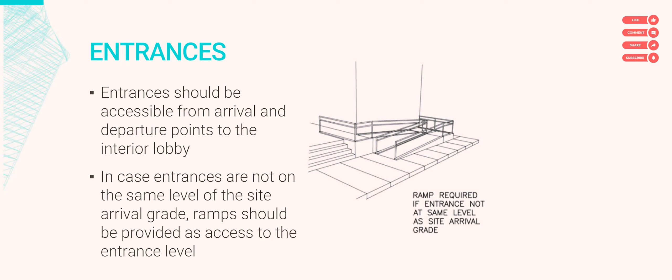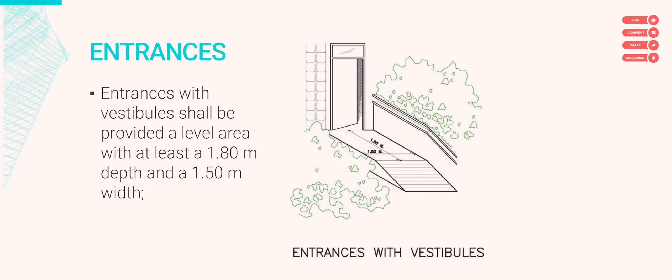Any change in level requires a ramp except when served by an elevator or any other mechanical device. Ito yung sinasabi ko, ramp yung pinaka-obvious na device, but there are times na hindi kasya yung ramp in a certain corner of the building. Kung hindi ka pwedeng mag-ramp, then find a different way. Dapat makahanap ka ng mechanical device that will do the same thing. The problem usually is you need to get from a lower elevation to a higher elevation or vice versa. Kung pwedeng ramp, ramp. Kung hindi kasya, usually a mechanical way of accessibility, so wheelchair lifts, elevators, etc.

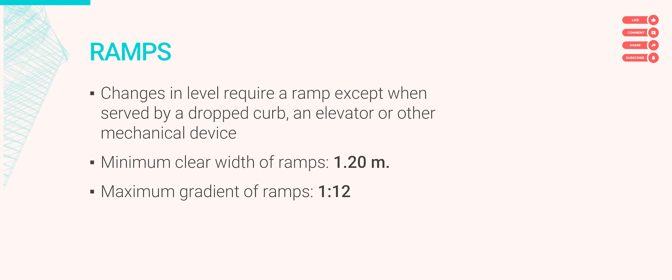For ramps, the minimum clear width is 1.2 meters and the maximum slope is 1:12. For those who have trouble understanding, ano ba yung 1:12, 1:20, 1:100? Pag sinabing 1:12, 1 unit vertical and 12 units horizontal. Pag sinabing 1:20, 1 and then 20, so it's going to be flatter. 1:20 is flatter than 1:12. Ito yung requirements for ramps illustrated: minimum width 1.2, maximum slope 1:12.

Other requirements: maximum ramp length 6 meters if the gradient is 1:12. If it needs to be longer than 6 meters, there have to be 1.5 meter deep landings before the next run of the ramp. Please also take note na yung 6 meter maximum length is measured horizontally, along the ground surface, not along the sloping surface of the ramp. That's very important.

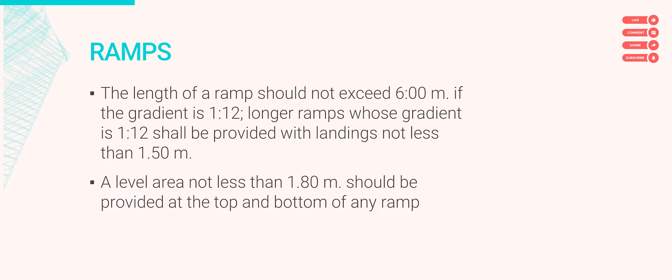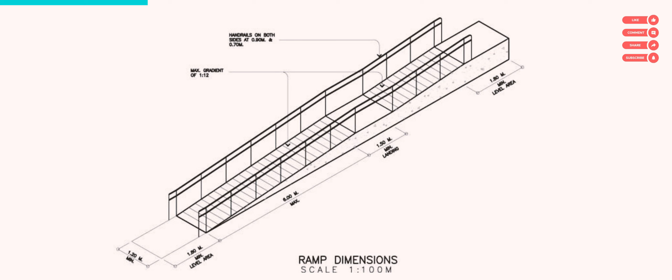There has to be a level area at least 1.8 meters deep at the top and at the bottom of any ramp. This is the bottom and this is the top. Meron tayong clear space measuring 1.8 meters deep, deeper than the landing, which is 1.5 lang. The others you're already familiar with: yung handrail, dalawa, isang 900, isang 700.

Other requirements for ramps, bukod sa handrail na 0.7 and 0.9: there have to be curbs on both sides with a minimum height of 0.10 meters or 100 millimeters. Both sides, meron kang low wall or zocalo about 4 inches tall, 100 millimeters, both sides of the ramp. That's required. Okay, next.

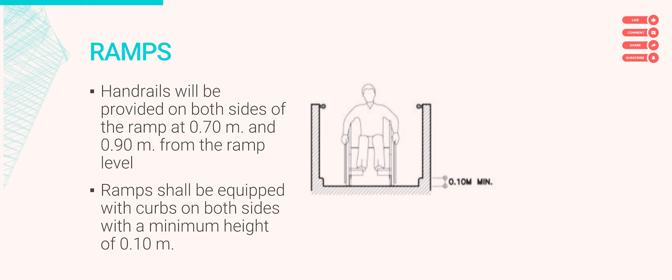Any ramp with a rise greater than 0.2 meters leading towards a vehicular area should have a railing across the full width of the lower end, not less than 1.8 meters from the foot of the ramp. So what's this about? This is about yung mga ganito, yung mga ramp na nakatutok siya sa kalsada. First of all, try to avoid doing this. Now, if you can avoid it, please avoid it. Kasi it could lead to nasty accidents for obvious reasons.

Nakatutok yung ramp sa kalsada. Try not to do that. But if it cannot be avoided, then you must look at this requirement because it might apply to your ramp. So first of all, this requirement applies to ramps na nakatutok sa kalsada, at least 0.2 meters tall. For ramps like that, dapat daw lagyan ng railing 1.8 meters away from the lower end of the ramp, from the foot of the ramp.

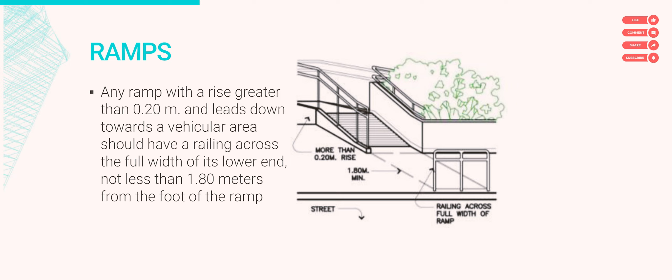You have this railing, standard railing siya, 900, 700, as wide as the ramp. Okay, ang purpose nito is yun nga, parang pang-catch siya in case merong ma-aksidente, like, pagka, I don't know, maybe you lose control of the wheelchair, we don't want you to fall down dun sa driveway, baka masagasaan ka. This railing is supposed to parang catch that, to prevent that from happening.

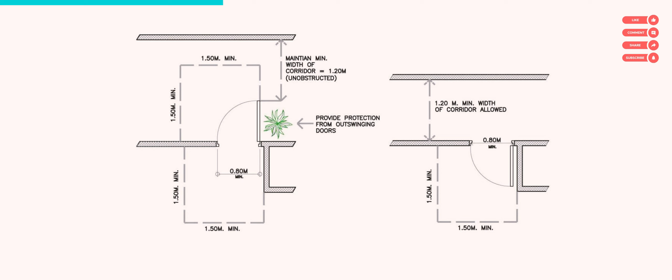Okay, now doors, minimum lapad lang yung binigay sa BP 344, minimum clear width is 800 millimeters. Okay, another requirement for doors is this. Dapat daw, well, first, if the door swings out into a hallway, then there have to be clear spaces 1.5 by 1.5 on both sides of the door. So again, 1.5 by 1.5 yung clear space, both sides of the door, if the door swings out into the hallway. Pero if the door doesn't really swing out, it swings in, then the 1.5 by 1.5 space is only required on the side of the room, not on the hallway. Yung sa hallway, kung ano lang yung required for hallways, which is 1.2, yun lang yung dapat i-provide.

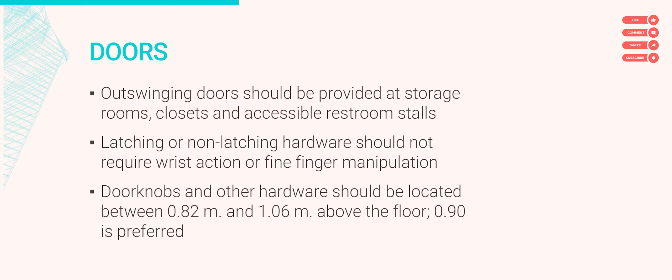Next, doors should swing out for storage rooms, closets, and PWD toilets. Dapat swing out. The hardware that you use for these doors should be easy to operate, not requiring complicated finger actions. Okay? And yung hardware should be mounted at the correct height. Ang nakalagay dito, anywhere between 0.82 to 1.06 meters from the floor line is okay, but the preferred height is 0.9 meters. So ito yung hardware. Again, anywhere between 0.82 to 1.06 is acceptable, pero the preferred height is 0.9.

Kung hindi doorknob, kunyari if you're going to use pull handles, try to mount them vertically. Dapat daw vertical mounting for easier operation. And the center line of the vertical handle should be at 1.06 from the floor. Okay, so ito yun. Again, if you're going to have a pull handle, ayaw natin yung horizontally mounted, dapat vertically mounted siya. And the center line of that handle should be at 1.06 meters from the floor.

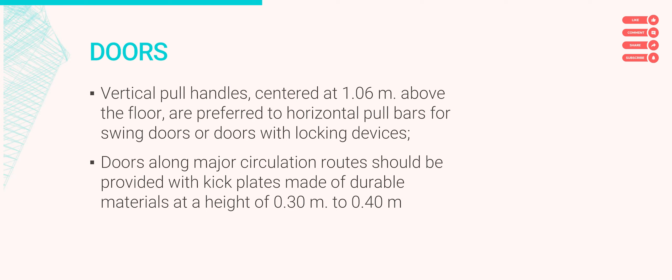If the door is located at a busy location, a major circulation area, then dapat meron siyang kick plate at the bottom made of a durable material, 0.3 to 0.4 meters in height. Kung busy location, busy area, basically kung yung door is going to be used many times in the day, then dapat lagyan siya ng kick plate. Ito yung kick plate natin. Sa baba, 0.3 to 0.4 yung height, made of durable material, like maybe metal.

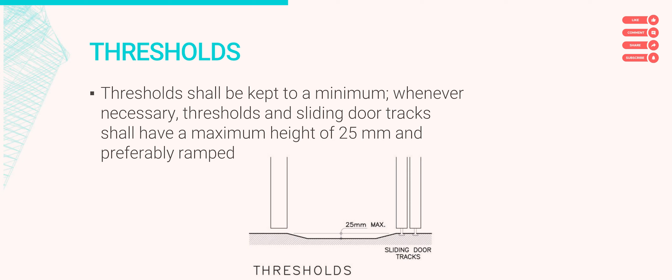Next, thresholds. For those who are unfamiliar, the threshold is parang the part of the floor underneath the door. Why do we need to talk about them? Kasi madalas dito nangyayari yung change in elevation. May step down, may step up dyan sa threshold. So, sabi dito ng BP 344, thresholds if necessary should have a maximum height of 25 millimeters and kung kayang gawing ramped, better. So, maximum height 25 millimeters lang. And kung kayang hindi gawing kwadrado, kung kayang gawing ramped, para mas suwabe yung transition, better.

Next, switches. As in switch ng ilaw. Correct mounting height ng switches, 1.2 to 1.3 meters from the floor and they should be located on the latch side, or the doorknob side. Not too far away from the doorknob side either. 200 millimeters maximum from the doorknob side.

So again, doorknob side dapat yung switch, wag sa hinge side, mas mahirap abutin doon. Ideally, pag bukas mo ng pinto, abot mo agad yung switch. So dapat nasa doorknob side siya. And not too far away either. Dapat maximum 200 millimeters away from the door. Okay? As for the mounting height, 1.2 to 1.3.

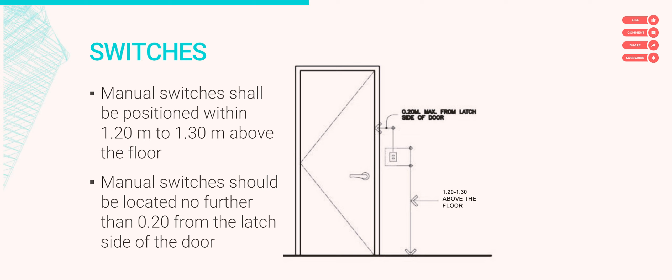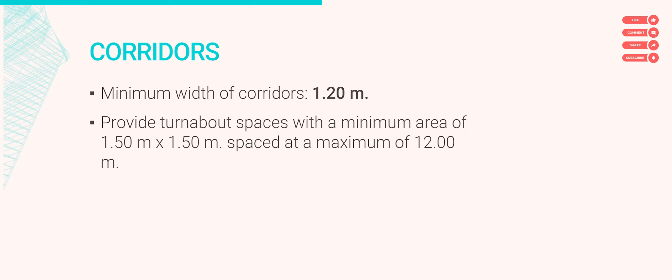Okay, corridors. Corridors in buildings are a lot like walkways sa labas, a lot like sidewalks. Lalakaran siya ng tao. So, a lot of the requirements that applied to sidewalks kanina actually apply to corridors as well. Like, for example, the minimum width is still 1.2. The turning space requirement still applies. Again, 1.5 by 1.5 clear space with a maximum spacing of 12 meters.

Same requirement. The only maybe new requirement for corridors na hindi applicable sa sidewalks before is this, yung turning space at the dead end. So, BP 344 requires na may turning space dapat na i-provide dito sa dead end. Again, the turning space measures 1.5 by 1.5. Kung may dead end ka, lagyan mo siya ng turning space. Kung hindi mo kayang ilagay dyan exactly, pwede mo siyang ilayo ng bahagya basta not farther than 3.5 meters away from the dead end.

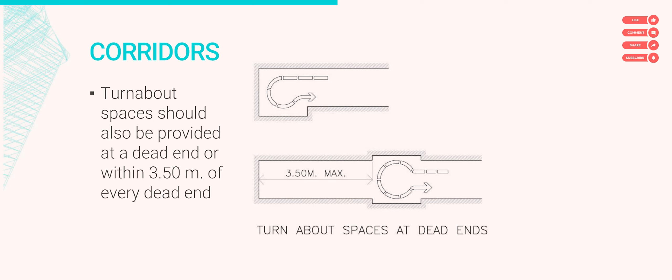Alright, let's talk about toilets. For PWDs, the toilet stall must measure 1.7 by 1.8, so 1.7 wide by 1.8 deep. As for how many PWD toilet stalls must be provided, you have to count kung ilang water closets yung meron for that floor. Okay, for every floor. And also per gender, kasi most toilets are gender-based. There's one for males and one for females.

Okay, pero for every 20 or less water closets, dapat at least one of them should be a PWD toilet stall. Again, there should be at least one PWD toilet stall if there are 20 water closets or less. And you increase the minimum to 2, at least two PWD toilet stalls if the water closets are more than 20. Okay, so again, that's what you do.

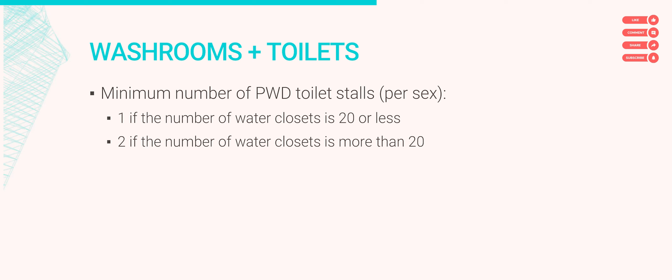So for example, isang toilet lang for males and another lang for females for this floor. All you need to do is look at how many water closets are there in each toilet. Okay, so if both naman have less than 20 water closets, then isang PWD toilet stall lang yung kailangan. Okay, let's go back to that toilet stall drawing. Other requirements for PWD toilets.

The mounting location of the water closet is 0.4 from one edge of the toilet stall. Hindi mo dapat ginigitna yung water closet sa stall. It has to be on one side only, 400 from the center line to the wall. Ang purpose is we're trying to free up this space for the wheelchair. Other requirements, yung grab bar, meron kang 900 by 900 na grab bar at the corner where you mount your toilet or your water closet. The door is 900 millimeters clear.

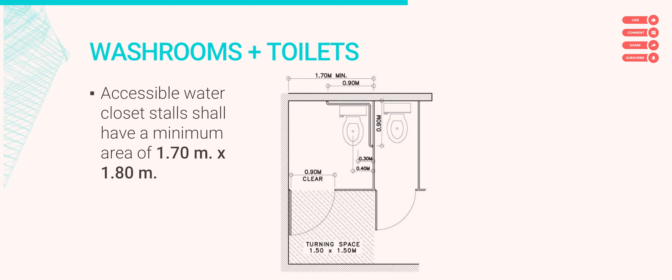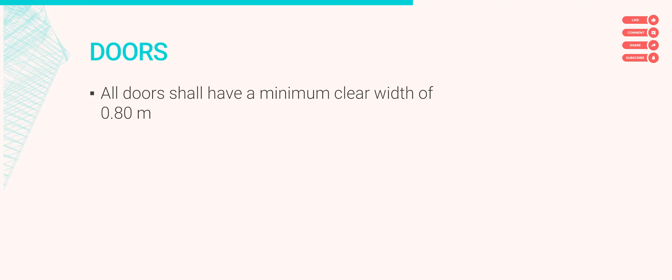Well, actually, this is wrong. I'm sorry. I don't know where I got this drawing. Pero standard door lang tayo, so 800 lang yung requirement ng BP 344. Pero it has to swing out. That's correct. We said that about toilet stalls. And another new requirement is turning space should be provided outside the PWD toilet stall, measuring 1.5 by 1.5. Okay, let me go back and make sure. Doors, yeah, the minimum clear width for doors is 800. So dapat 800 yung nasa drawing na yun.

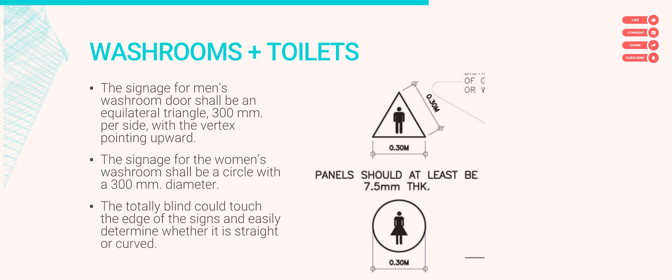Okay, other things, toilet signages. For men's toilets, dapat triangular, pointing upward, equilateral triangle, 300 per side. For women's toilets, bilog yung signage, 300 millimeter diameter. The purpose of this is so that the blind can easily tell kung men's or women's toilet ba yung toilet, because all they need to do is touch the signage. If there's a curved edge, they know right away it's for women. If there's a straight edge or a sharp corner, they know right away it's for men.

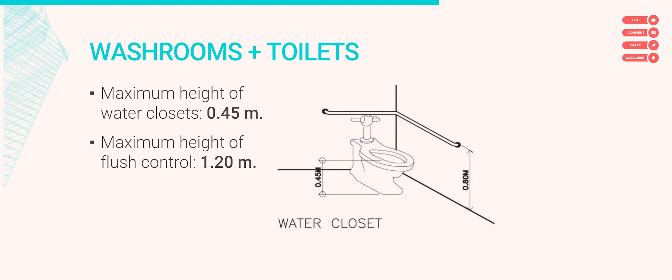Okay, other things, maximum height ng water closet seat is 0.45 meters. Maximum height naman ng flush control is 1.2 meters. Another thing, something that you won't see in the text but is in the official drawings: 0.8 dapat daw yung mounting height ng grab bar.

Okay, for lavatories, the lavabo maximum height is 800. A lot of students get this wrong, a lot of them for some reason answer 850. But again, it's 800 millimeters from the floor, maximum.

And the space under the lavatory should be a clear space. We call that the knee recess space. Imagine you're in a wheelchair, if you're going to use the lavatory to operate the faucet, you might need to insert your knees under the lavatory a bit to reach the faucet. So that's what this space is for. That's why it should not be obstructed with drawers or cabinet doors. It should be a clear space. The clearances required are 0.6 to 0.7 vertical and 0.5 horizontal, or the minimum depth is 0.5. As for urinals, for them to be considered accessible, it should have an elongated lip.

This is what an elongated lip looks like, and the maximum height of the lip is 0.48. Now, it's not in the text, but it's in some of the official drawings that an accessible urinal should have a grab bar. The grab bar is 600 millimeters tall, mounted 600 millimeters from the floor.

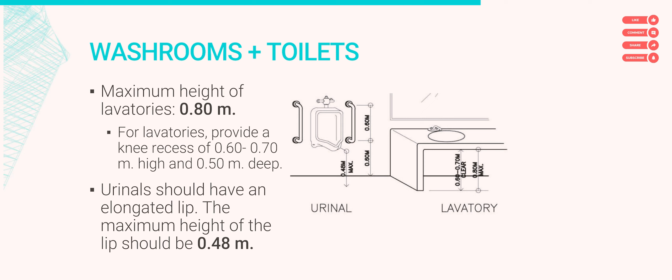Okay, for stairs, the tread should be slip resistant, which is obvious. And for the nosings of the tread, slanted nosings are preferred to projecting nosings or to open stringers. This is what's called a projecting nosing. This is a slanted nosing, which is what we prefer.

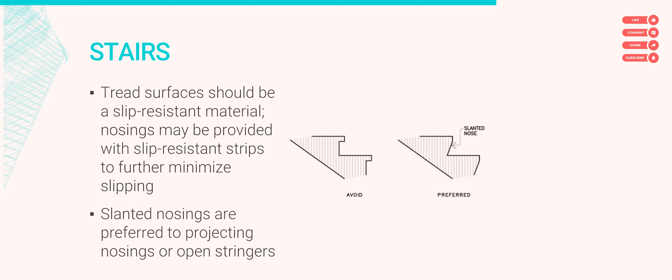The main reason is there's a chance you could get caught here, or your foot could get hooked on that corner. It's much less likely to happen with a slanted nosing. Now, open stringers, which also must be avoided, we have guidelines like this.

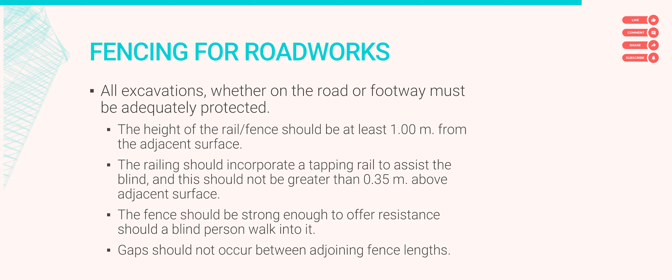Okay, the last part of BP 344 deals with safety. This is really more about excavations outside on the road. We don't want people falling in, especially the blind. It states that all excavations, whether on the road or footway, must be adequately protected. It's easier to explain in this drawing. So suppose there's an excavation on the sidewalk, outside.

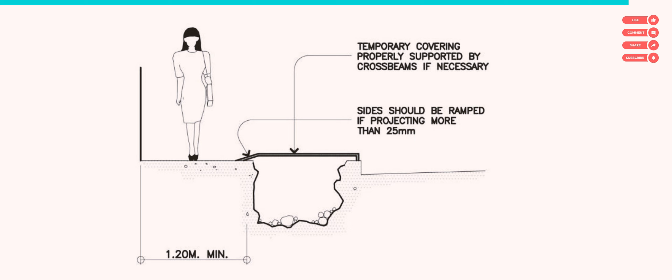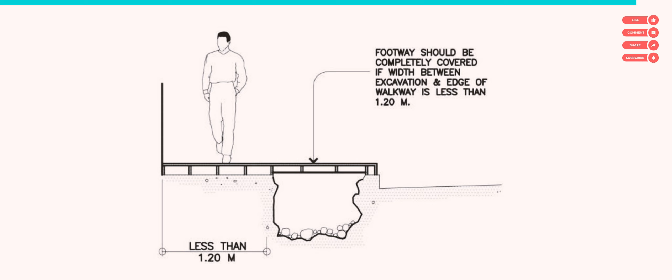Other requirements for safety: all excavations, if there's no fence, should be covered. This temporary cover should not lessen the required clearance for the walkway. This walkway should still be 1.2 meters wide. And at the corner, it's better to have it sloping or a ramp. If doing a cover will result in less than 1.2 meter wide walkways, it's better to just cover the whole thing so there's a wide area for people to walk. Again, we never want the walkway to be less than 1.2 meters wide.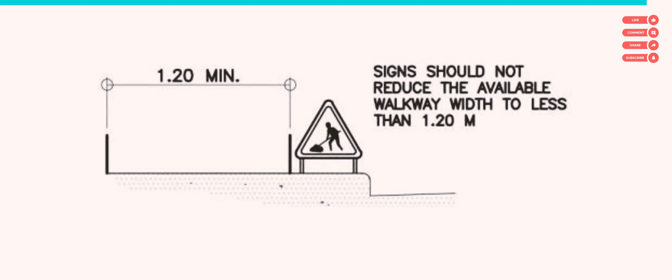Same goes for signages. If you're going to have a signage, don't place it on the walkway. Again, we have a clearance here of 1.2 meters, it has to be clear. If the signage would end up there, try to place it elsewhere, like in grass verges if available. Just make sure that this 1.2 meter clearance is unobstructed. Again, 1.2 unobstructed.